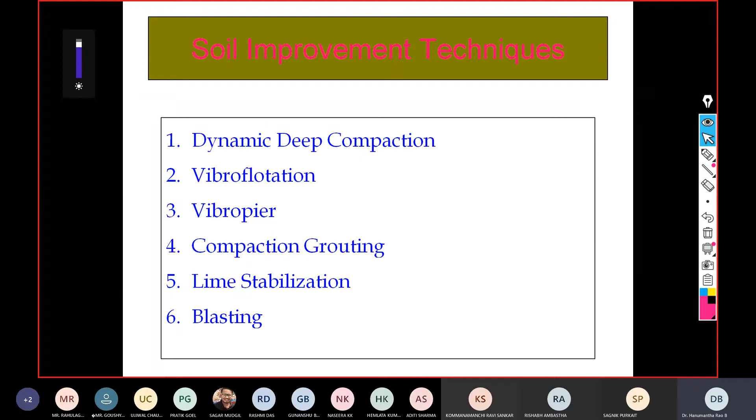Let me start another ground improvement technique. This is one of the very simple, effective, and economical ground improvement techniques. There are several ground improvement techniques, and a few of them have been listed here: dynamic deep compaction, vibroflotation, vibropier, compaction grouting, lime stabilization, and blasting.

Today I'm going to talk about one kind of in situ densification of the soil sample, that is deep dynamic compaction. Now, to understand the meaning of deep dynamic compaction and its application, first let us try to recall what we discussed in the previous class on compaction.

If you look at the left side picture, this typically represents compaction. When you talk about conventional compaction, what we normally do is compact the soil layers in thin lifts, or in several number of layers. As we can witness from this picture, we compact the soil sample in layers: 1, 2, 3, 4. We are also aware that the thickness of each lift shall not exceed 200 to 300 millimeters.

That is one of the biggest limitations of conventional compaction when using rollers. Just imagine if a 200 millimeter thick sample is the limitation, then if you want to compact a 1 meter thick soil deposit, you have to excavate the whole soil sample and again replace it in 4 or 5 layers, compacting each layer. This is very laborious and time consuming. Moreover, just imagine a requirement where...

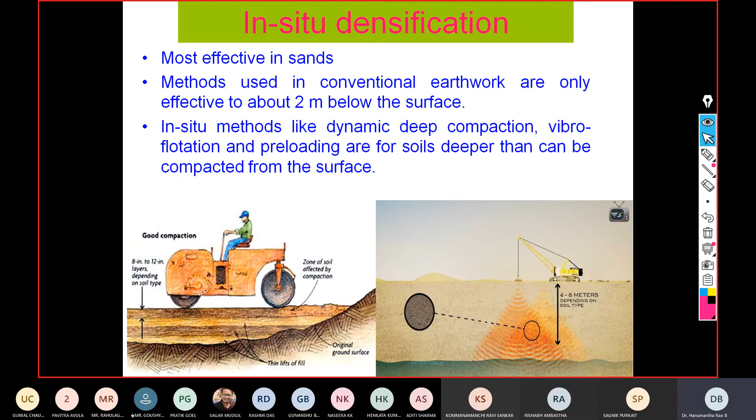Let us try to have more details about what is deep dynamic compaction, how it works, what are the different other dynamic deep compaction techniques, and what is its application. First of all, when you talk about deep dynamic compaction, this is valid only for sands or coarse grained soils. I will explain the justification why it is valid only for sand in the subsequent slides.

In this slide, a couple of ground improvement techniques have been shown. The top left side is vibroflotation. Here a vibrofloat, as you can see in this picture, is driven into the ground up to the desired depth. Because of the vibration, this vibrofloat vibrates and accentuates the vibration energy in the lateral direction, and thereby densifies the soil in the lateral direction, not in the vertical direction. Anyhow, we are going to cover a full chapter only on vibroflotation.

So vibroflotation is one of the deep dynamic compaction techniques. The vibrofloat can go up to hopefully 60 meter depth, because it only depends upon how much depth we can drive the probe. This is the probe, and as long as we can drive the probe, that much depth of the soil can be densified. The second ground improvement technique is deep dynamic compaction.

Here a heavy tamper having a large weight is used to densify the soil mass below the tamper. This is the tamper. When you drop this tamper from a large height, you can see this is the height, because of the potential energy, the soil below the tamper gets densified. Deep dynamic compaction is said to be effective up to a depth of 40 meters, but this is only tentative, as I told. Then another technique is dynamic roller compaction.

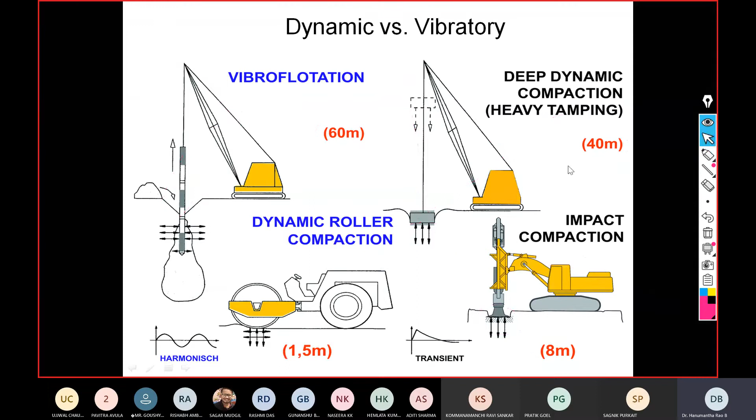I hope it is clear to you all now. So vibroflotation is typically used for sand. Deep dynamic compaction is typically used for sand. Impact compaction preferably for sand, but for mixtures of other soils also. Dynamic roller compaction for mixtures of all other soils. So this is the details about the dynamic compaction.

As we can see, this is a crane. This is a big crane, and this is called a tamper. This is the height. The crane is used to lift the tamper to a particular height and drop it on the soil mass.

This technique was first proposed by Louis Menard in the year 1960. This is one of the ground improvement techniques, implementable in case of building foundations, roads, or railway embankments. In all these applications, deep dynamic compaction is used. This is one of the high energy compaction techniques, where the high energy impact is caused by dropping a tamper from a large height.

So these are some details about the tamper. Dropping of heavy weight - this is the heavy weight. What is the weight of this one? 100 to 400 kilonewton, so this is substantially high. Then the height we can lift up to is in the range of 5 to 30 meters.

The lift height depends upon what is the depth of improvement that you are envisaging. If the depth of improvement is small, then we can lift only 5 meters. If the depth of improvement requirement is significant, then we can go for higher lifts, say 30 meters. When this tamper is lifted and dropped, only a particular location of the soil sample gets densified. But what if I want to densify a large area? Then I have to follow some kind of pattern.

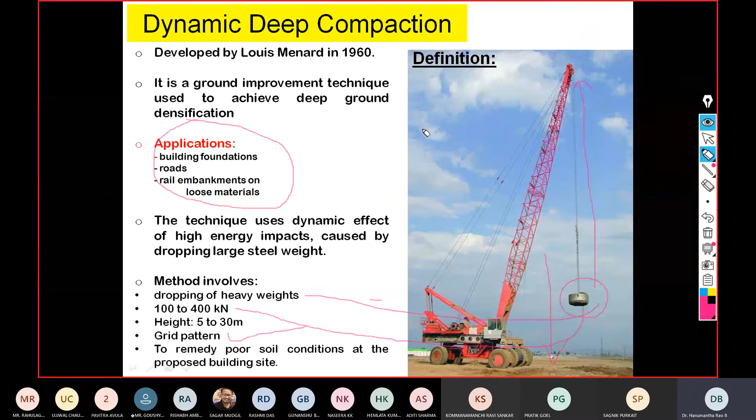So this is the deep dynamic compaction. As you can see, this is the pounder or tamper. Mass is 5 to 30 tons and drop height is 10 to 30 meters. When you drop this tamper, it is going to create some kind of hole that is called a crater. Now we can see this crater is created on in situ soil.

So the soil underneath the tamper is totally densified or compacted. This technique is particularly well adapted for non-organic, non-homogeneous fills, ground reclamation areas, and karst terrains with sinkholes. It is typically used for sandy soils, fill soils, man-made embankments, and so on. Wherever you find loose soil, you can go for deep dynamic compaction. However, the biggest limitation is that this is typically valid only for granular soil, not cohesive soil.

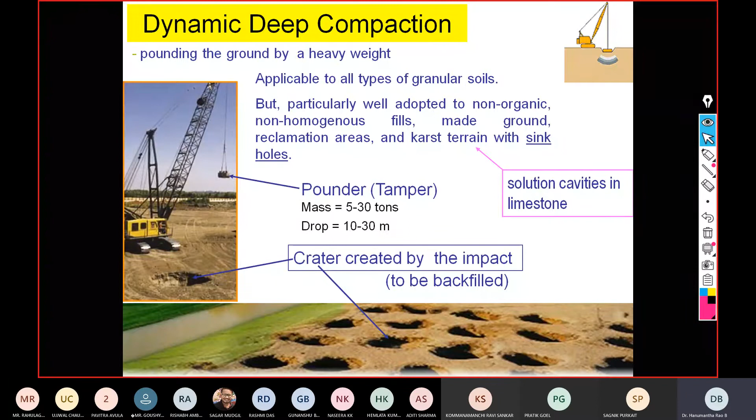As I told you, when you go for deep dynamic compaction, we follow a specific pattern. Here it has been shown in a linear way. These red circles indicate the gap left between two impacts. So this is one impact, this is the second impact, third impact, fourth impact, and subsequent impacts.

As you can see, the impacted area is designated with a kind of triangle. This indicates the transmission of energy from the ground surface to deeper levels. As you go deeper and deeper, the energy transmits over a wider area, which is why it is triangular in form. We saw the same thing in the case of consolidation, where we assumed the spreading of the load as one horizontal to two vertical, or one vertical to two horizontal.

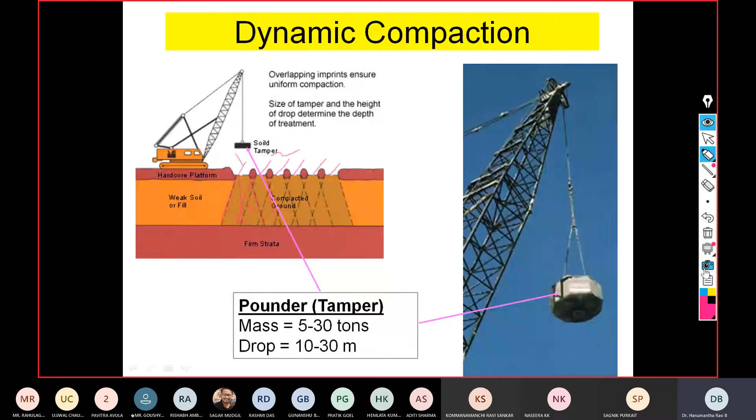So therefore, what should be the optimum spacing between any two impacts? That is one of the design parameters.

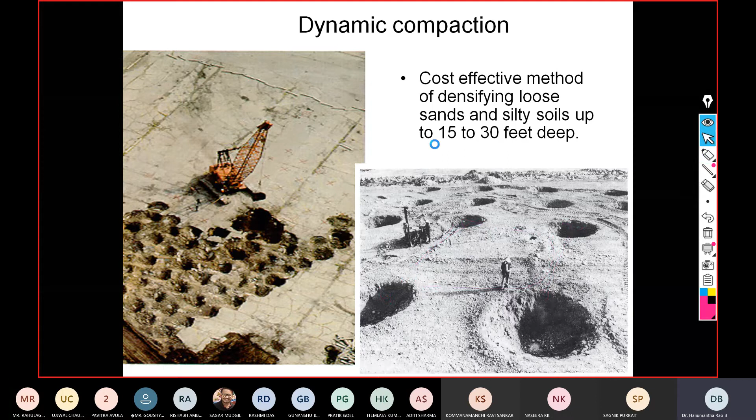These are some advantages and limitations of deep dynamic compaction. It is particularly useful when the area is too large; if the area is greater than 5,000 square meters, it is most economical. It reduces the volume of the landfill, fill material, waste material, or reclaimed soil, as the volume appears in the form of a crater. More craters mean more reduction in volume; deeper craters mean more reduction in volume, or more densification. It increases in-situ density and collapses the voids. In fact, unless there is a collapse of the voids, there is no improvement in density. So density and the removal of voids are interrelated.

Since we talk about compaction, we should explicitly understand that it is expulsion of air from the voids, not the expulsion of water from the voids. If it is expulsion of water, then that becomes consolidation. Once density is increased, it obviously increases the bearing capacity and reduces post-construction settlement.

This is one fundamental thing you must understand with regard to ground improvement: the primary purpose of adopting any ground improvement technique is for two things. Suppose the soil is poor, having very low bearing capacity, or where settlements are too large. What we do by adopting ground improvement is create a situation where, by artificially imposing the load, we enhance the settlements even before construction of the structure.

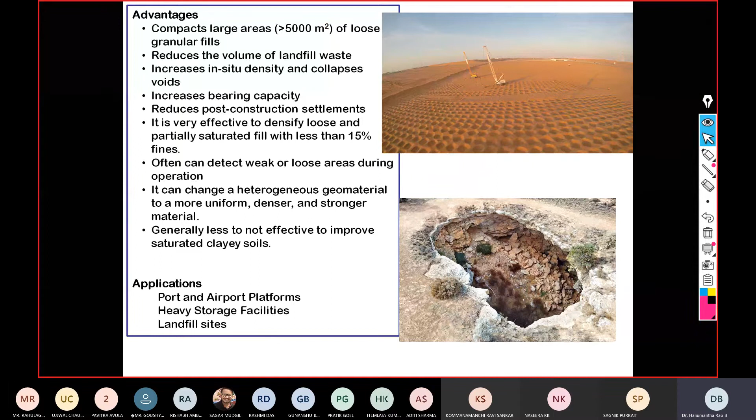And the applications of dynamic compaction are enormous. This is particularly useful for construction of ports and even airports, heavy storage facilities like oil storage facilities, landfill sites, or reclaimed soils. So this is the fundamental mechanism of dynamic compaction.

As you can see, when a heavy tamper is dropped from a particular height, this creates an impact energy. First of all, impact energy - this impact energy is because of the potential energy created from the heavy weight dropping from height. This is something like mgh, that is the potential energy.

Now when there is a sudden, instantaneous impact, this creates a kind of shock wave, which generates some kind of waves. Since it is on the surface, as we know from the soil dynamics chapter, on the surface only two kinds of waves can be generated: Rayleigh waves or Love waves. In this case, they are Rayleigh waves. And as compared with the P wave or S wave, Rayleigh waves and Love waves are more dangerous and more destructive of the particle structure.

So when the shock wave is developed and is moving or transmitting from the ground surface to the deeper layers, it rearranges the particles because of the impact energy. That rearrangement takes place simultaneously in the vertical direction as well as in the lateral direction. Therefore, when there is dynamic compaction, it is not only the soil in the vertical direction that gets densified, but in the lateral direction also.

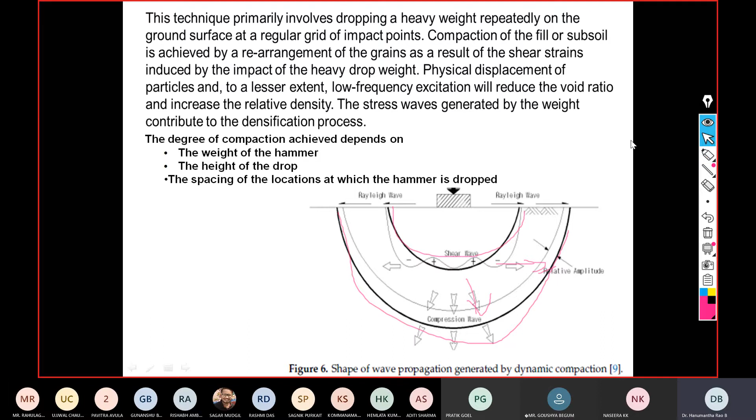Okay, now is it clear why the dynamic compaction is valid only for sand? It's not valid for the clay material. But people have already tried the effectiveness of dynamic compaction on clay as well, and in that case, we will see what happens.

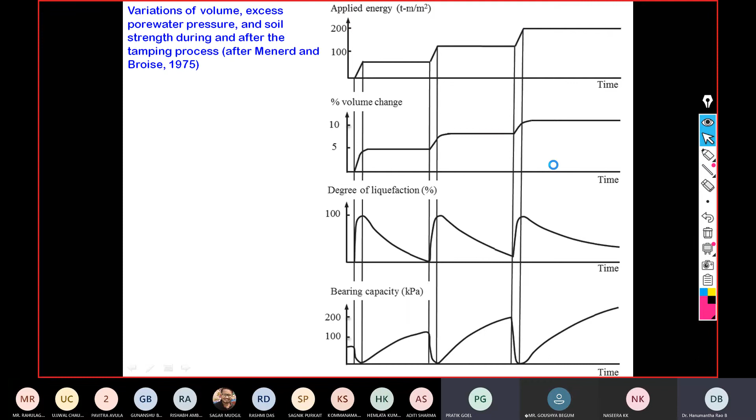So depending upon the soil type on which you are going to use the dynamic compaction, if it is sand, it is called dynamic densification. If it is clay, then it is called dynamic consolidation. So densification I just explained: impact by a heavy tamper on unsaturated granular material immediately displaces the particles to a denser state. This is simple expulsion of air from the voids.

Dynamic consolidation: this theory was proposed by Menard and Broise in the year 1975. They tried to use dynamic compaction on saturated fine-grained soil by applying repeated blows. So here, when there is an impact, in case of clay it cannot undergo liquefaction; rather, it turns into slurry.

Depending upon the soil type, other phenomena can happen. In case of dynamic consolidation, there are four kinds of phenomena: compressibility of saturated soil, liquefaction, change of permeability, and thixotropy. The last one is most important. Thixotropy means regain in strength, as you must have understood in soil mechanics, with time under undisturbed condition.

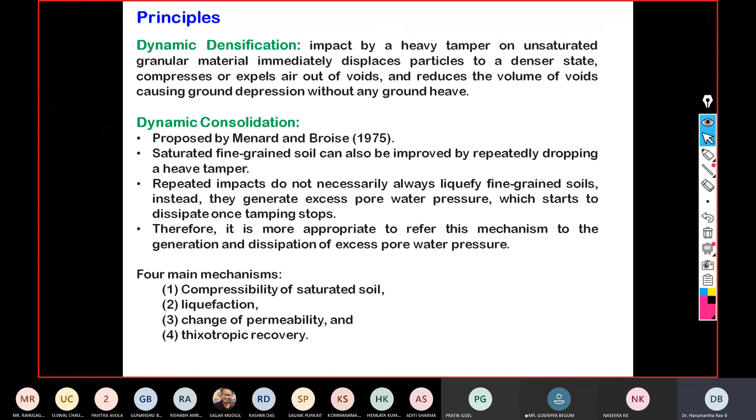There is compressibility of the saturated soil. This happens only when there is expulsion of water, but that cannot happen immediately. What immediately happens is generation of excess pore water pressure, and that pore water pressure keeps dissipating with respect to time. When pore water pressure gets dissipated, the consolidation obviously happens.

Due to the impact, there is formation of fissures, through which water gushes out. When water comes out, the consolidation gets accelerated. Before impact there were no fissures, but after impact the water comes out through the fissures. Therefore one can easily expect a change in the permeability.

The last phenomenon is thixotropy, which is regain in strength when the sample is kept in undisturbed soil condition. This is specifically valid for clayey soils, not valid for sands - in fact it's not valid, it is valid only for fine-grained clays. This is the difference of implementation of dynamic compaction on sandy soils versus clayey soils.

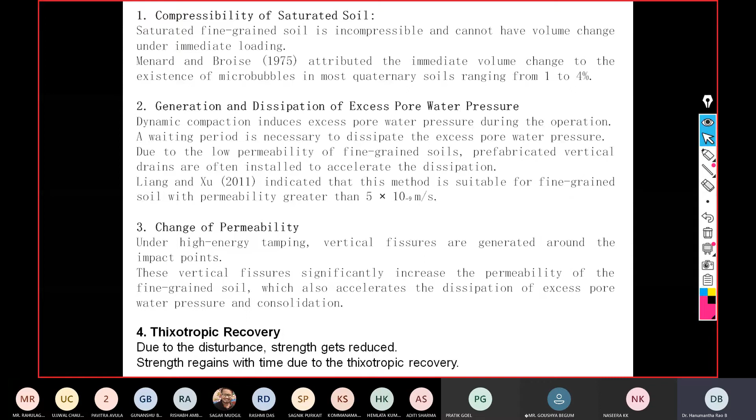Now let us come to the design part. That is the mechanism. During dynamic consolidation, does the structure of clay also change? Yeah, obviously. There is complete destruction of the structure, and there is a new formation of the structure.

Does it go from flocculated to dispersed stage, or does the structure break completely? There is no breakage of structure, because clay particles are nanometers or micrometers - usually no particle breaks, but even if breaking occurs, they rearrange from flocculated state to dispersed state. In case of dispersed state, permeability should reduce - so it is increasing just because of the cracks. Yeah, the permeability increases only because of the cracks.

But if you look at the permeability of the compacted soil after elapsed time, that permeability is obviously much lesser.

Now we understood the mechanism of deep dynamic compaction. How shall I understand how much depth of soil I can improve? This is designated as improvement depth, DI. We have only two parameters: the weight of the tamper and the height of fall. The depth of improvement should be proportional to the weight of the tamper and fall height. Several people have made analytical derivations relating depth of improvement with W into H, and introduced a constant called alpha.

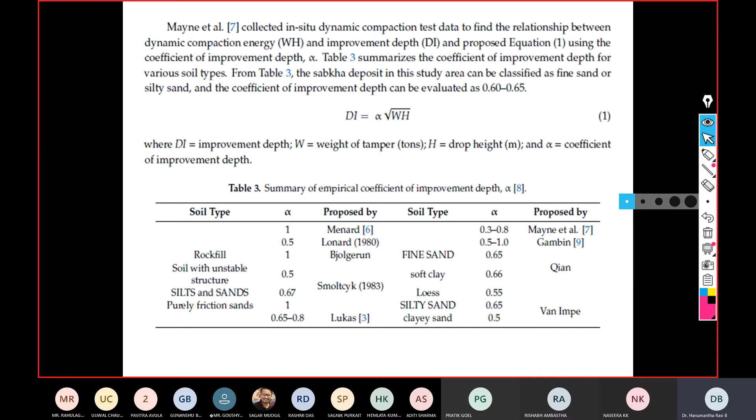So this is clear, and this is a simple equation one can use to determine the improvement depth based on the amount of energy applied on the soil sample.

Depending upon the type of soil that you are dealing with, people have categorized the soil into 3 zones: zone 1, zone 2, and zone 3. This zonation has been done based on 2 parameters: permeability and plasticity index.

Zone 1 consists of pervious soils like coarse grained soils, gravels and sands, where the plasticity index is 0, non-plastic soils, and the permeability is very high, 10 power minus 3 centimeter per second.

Zone 2 is semi-pervious soils. These soils exhibit plastic behavior, where the plasticity index ranges from 0 to 8 and the permeability is 10 power minus 3 to 10 power minus 6.

Zone 3 is impervious soils, where the plasticity index is above 8 and the permeability is 10 power minus 6 centimeter per second, low permeability, so almost impervious soils.

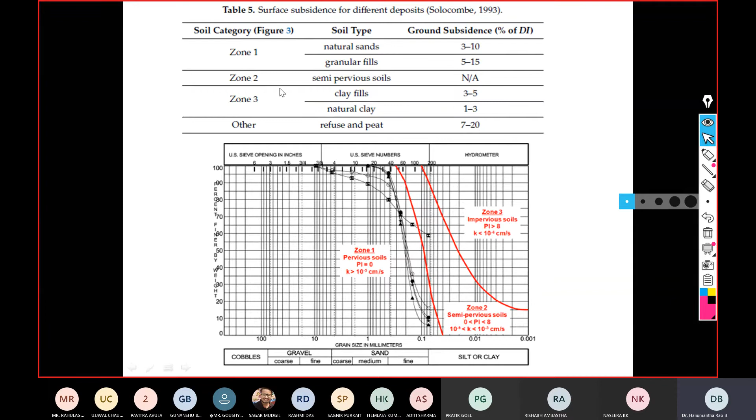You can see what kind of soils fall under zone 1: natural sands and granular fills. Zone 2: semi-pervious soils, nothing specific. Zone 3: clay fills and natural clay. This is how one can understand zone 1, zone 2, and zone 3, and the approximate ground subsidence anticipated for each.

So why is dynamic compaction required? This question is already attempted. The technique is used to improve the bearing capacity, density, shear strength, consolidation, and so on, especially of cohesionless soils.

This technique is ideally meant for pervious soils, that is coarse grained soils, sands, fills, reclaimed soils of granular materials, and so on. It also decreases the permeability and thereby reduces the liquefaction potential.

One thing you should understand is that during dynamic compaction itself, we are creating a localized liquefaction phenomenon within the soil mass. So therefore, once it is densified, it is anticipated that no more liquefaction could occur after the construction of the structure on that particular soil sample.

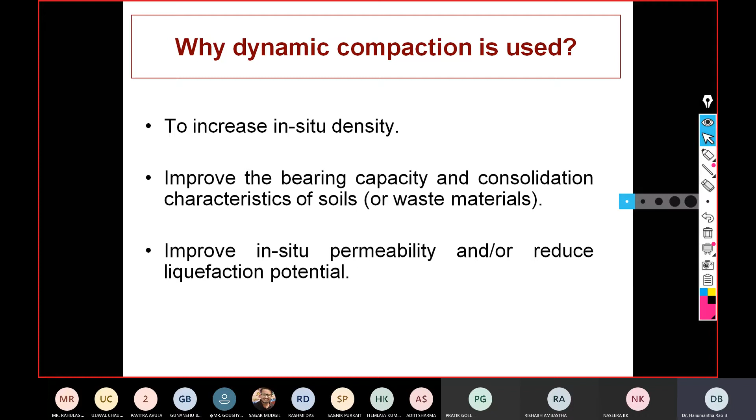This slide talks about the suitability of deep dynamic compaction in a very elaborative way. All pros and cons have been listed in this slide. The technique is most effective for coarse, free, drained, granular soils.

So try to understand: it should be coarse grained soil, and there should be free drainage, meaning the permeability of the soil should be very high. Whether well or poorly graded, or saturated or not, doesn't matter, but the material has to be coarse, free draining, granular soil. Cohesive soils tend to absorb the energy.

This energy is required to separate water molecules from the clay particles. So the much amount of energy is only used to separate the water molecules from the soil, and densification cannot happen. Such absorption of energy limits the technique's effectiveness. It is not recommended for clayey soil with high plasticity index, greater than 8, and high degree of saturation.

So this is quite clear. It is especially suited to compaction of rock fills, because all rock fills are free draining materials. Therefore the technique is highly effective for rock fills and gravels with boulders, and of refuse and waste tips. Refuse means, once you have used rock materials or crushed rock, this is called refuse or waste, and natural heterogeneous coarse soils.

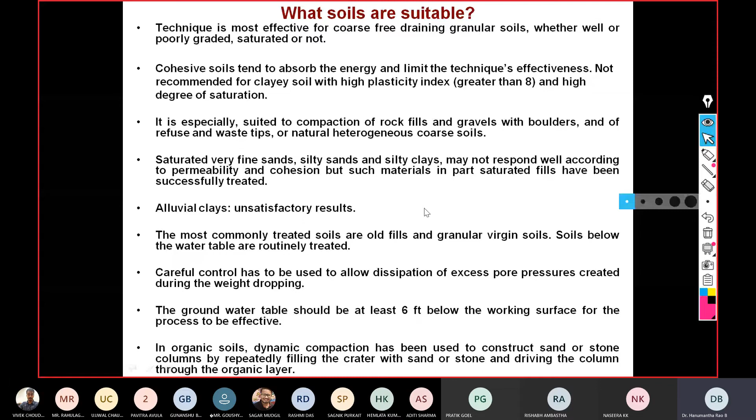In organic soils, dynamic compaction has been used to construct sand or stone columns by repeatedly filling. So this technique is not valid for organic soils, but dynamic compaction can be used to create other kinds of structures in organic soils. These are the elaborative descriptions about the suitability of dynamic compaction for different soil types.

This is another recommendation: expected improvement and required energy with dynamic compaction. This table is very important, it can be taken as some kind of guideline. For example, if you are dealing with gravel and sand with less than 10% silt and no clay, the expected improvement is excellent. The typical energy requirement is 2 to 2.5 tons-feet per cubic feet. These figures were proposed by different people depending upon field data.

Suppose you are dealing with sand with 10 to 80% silt, less than 20% clay, and a plasticity index of less than 8. These are called moderately effective if dry and minimal if moist. So the effectiveness of the technique is moderate if the soil is dry and minimal if it is moist. The amount of energy required is slightly high, that is 2.5 to 3.5.

Fine grained soil with plasticity index greater than 8 is not applicable. We forgot about landfill - excellent, with the amount of energy required being 6 to 11.

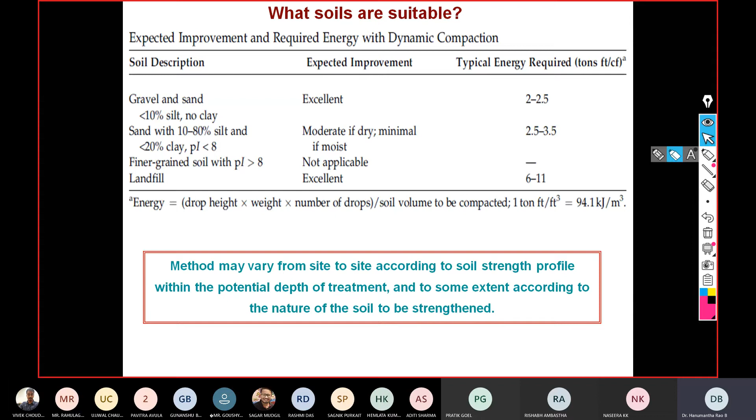So we know total how much energy we are applying in case of the standard or modified Proctor. But when you go for dynamic compaction, we do not know what volume is going to be impacted, so this is based on an assumption. So these are the different stages.

First, prior to the commencement of work, a granular blanket of 1 meter thick is placed on the treated area, on top of the soil to be treated. The weight is dropped from a height of 25 meters, with up to 5 number of passes and up to 10 number of drops per pass.

Here there are two things: number of passes and number of drops. At a particular location, it is not only one drop - we can go for more than one drop, that is, multiple drops can be done at one particular location. It is followed in a particular rows and columns pattern, the rows in horizontal, length and width directions. So at the same location, again you can come up and again drop from height.

For example, say 10 number of drops are required at one place. I can divide the 10 into 5 passes, meaning corresponding to each pass, 2 numbers. First, I can make one row, so at each location I go for 2 drops. Then come again for 2 drops, come again, and then again 2 drops - that is one pass with 2 number of drops. On the first pass, the deepest layers are compacted.

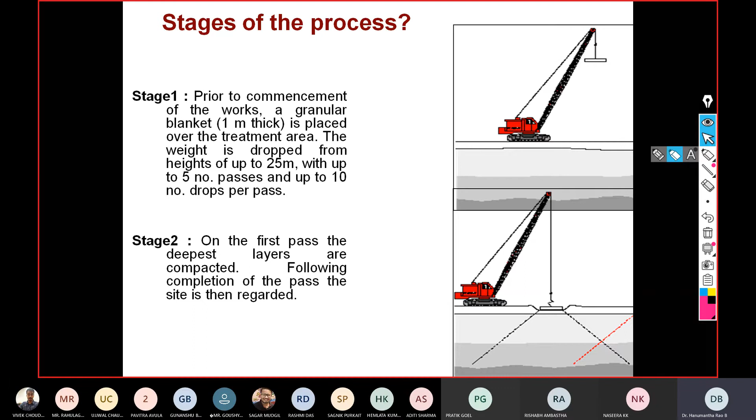Following the completion of the pass, the site is then regraded. During the initial passes, the deepest soil layers get compacted. Subsequent passes compact the successively shallower layers, following which the site is regraded. The final tamping pass is often continuous to compact the soil at shallow depth.

So if you look at stage 1 to stage 4, these stages indicate clearly 3 points. The first is during the initial pass, the deeper soil gets compacted. During the second pass, the intermediate soil gets compacted. During the final pass, the top soil gets compacted.

Now, if you recall from any of the previous slides, the soil between the craters is always in a loosened state. Therefore, we need to level the ground so that all the craters are filled with the loosened soil. So the final pass is always meant to compact the leveled soil. That is the meaning of it.

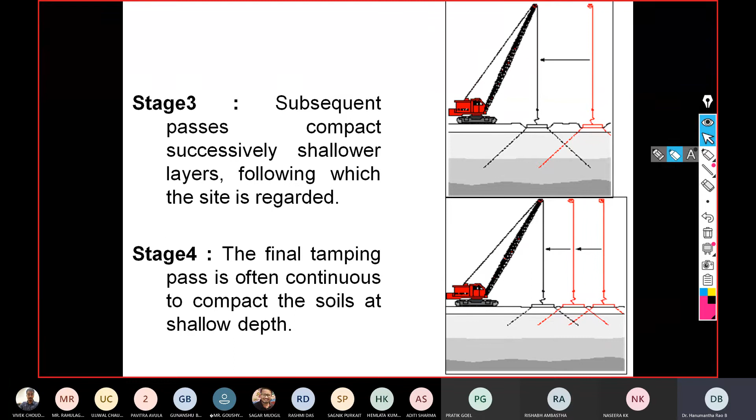So these are some knowledge points about deep dynamic compaction. When there is a drop, you can see the formation of the failure plane and the zone of compaction. This is the zone of compaction, and this dotted line indicates the potential slip surface.

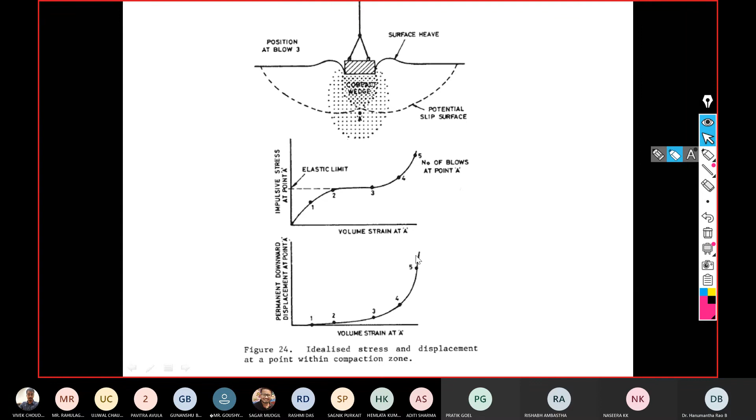So this is the sudden volume change because of the application of the heavy impact load. But if you look at the ultimate state, both the soils are achieving the same state. When you resort to deep dynamic compaction or consolidation, both ultimately have to reach the same state. However, the initial treatment that we apply is a bit different, but the ultimate state that they are reaching remains the same.

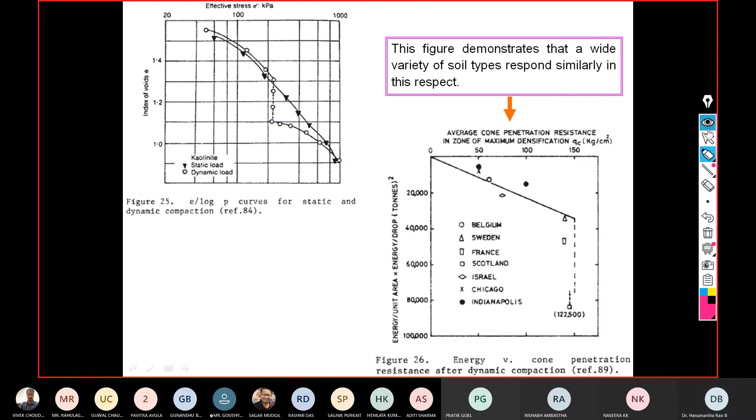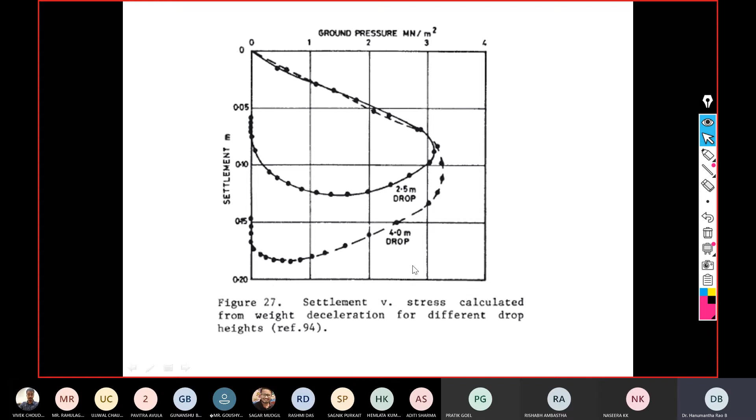So this is the ground pressure versus settlement as a function of the number of drops, and settlement versus stress calculated from weight deceleration for different drop heights. There is a settlement, then a recovery - there is a settlement and there is a recovery, depending upon the soil type.

If you draw a correlation between the square root of the energy applied versus the depth of improvement, and draw a linear graph, the slope is nothing but the coefficient of depth of improvement.

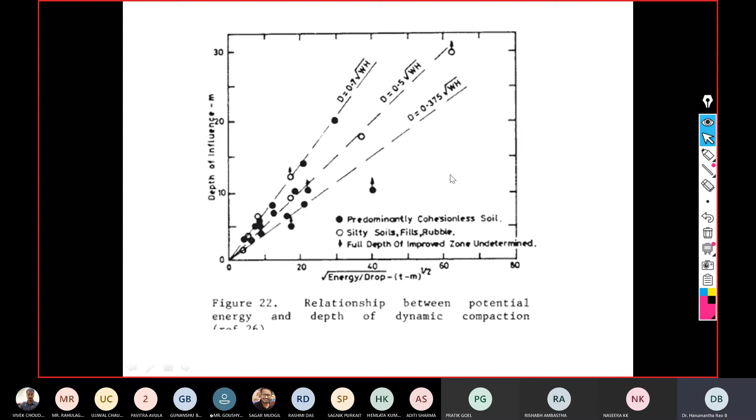So once the dynamic compaction has been done, how do we ensure whether or not we achieve the desired density? How do we ascertain this point? In order to ascertain this, we need to conduct some kind of in situ investigation. But what kind of in situ investigation should we conduct so that I'll be aware that the soil has reached the desired density?

One of the simplest techniques is we can go for SPT, that is standard penetration test, or cone penetration test, or pressure meter test. The type of test you should conduct depends upon your requirement. Suppose if your requirement is only settlement, then you can go for SPT or CPT. Or if your requirement is more of load bearing capacity, less of settlement, then we should go for the pressure meter test. So these are a few soil investigation techniques that should be done post dynamic compaction to ascertain whether or not the soil has been improved to the desired degree.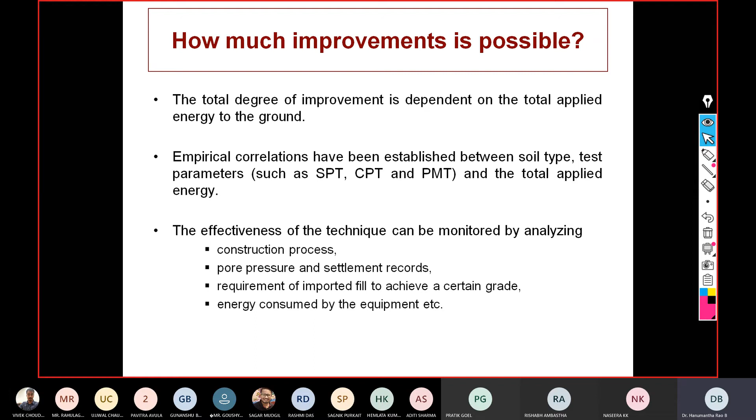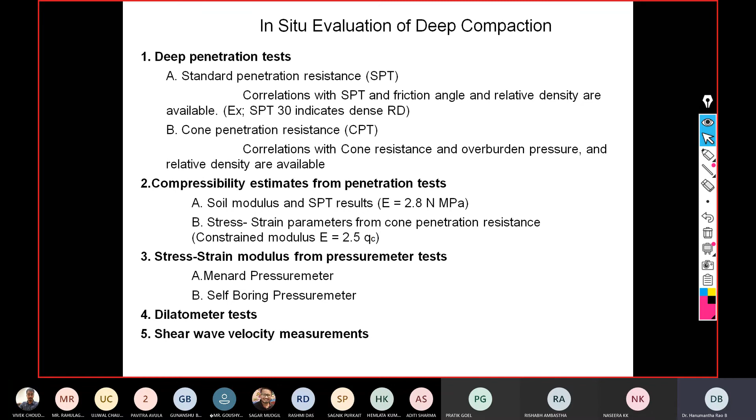So again, the list of other techniques: deep penetration test, SPT, CPT, then compressibility estimates from penetration test, then stress strain modulus from the pressure meter test. Either you can go for the Menard pressure meter or self-boring pressure meter, or you can also conduct dilatometer test or shear wave velocity measurement test. So these are the variety of tests that can be conducted on site which is subjected to deep dynamic compaction.

So this is the response before and after the ground has been subjected to dynamic compaction. As you can see here, this is the SPT profile as a function of depth - before compaction and after compaction. You can see there is a huge increase in the values of the SPT. Similarly, CPT value before and after dynamic compaction, and similarly pressure meter test before and after compaction. This is how you should ascertain that the ground has improved to the desired degree.

Because once we know the SPT value, the CPT value, or pressure meter value, we can correlate these things with bearing capacity and settlement. Thereby we can ascertain whether the compaction which was done is enough or not.

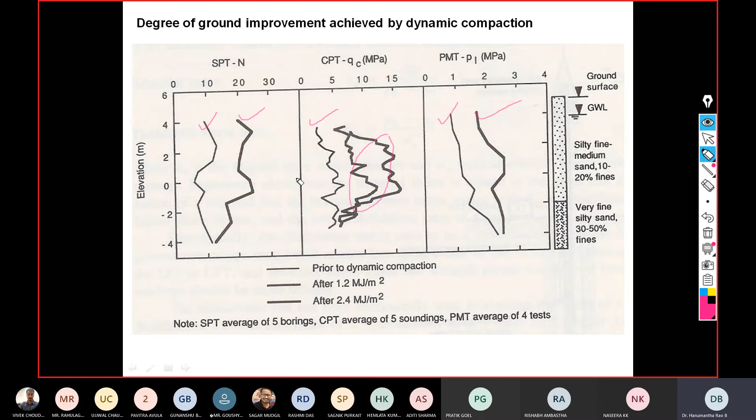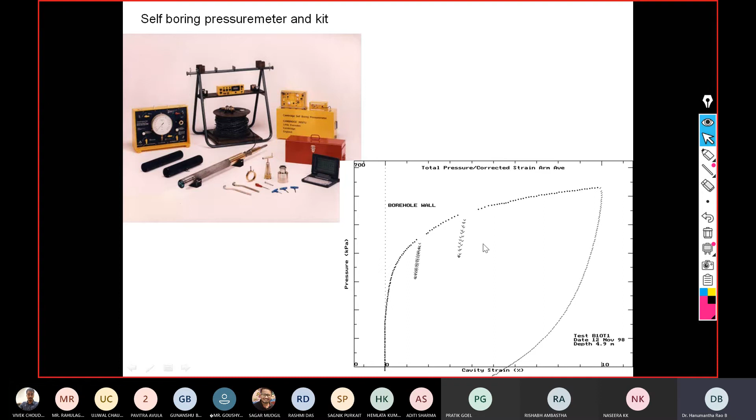So these are the devices. This is the self-boring pressure meter kit, and this is the response of the self-boring pressure meter kit. This is the flat dilatometer, and this is the setup for shear wave velocity measurement. So these are the shear wave velocity measurements as a function of depth - this is before and this is after. As you can see, there is a huge improvement in the shear wave velocity. Since the soil remains the same, the increase in shear wave velocity indicates that there is an improvement in the density.

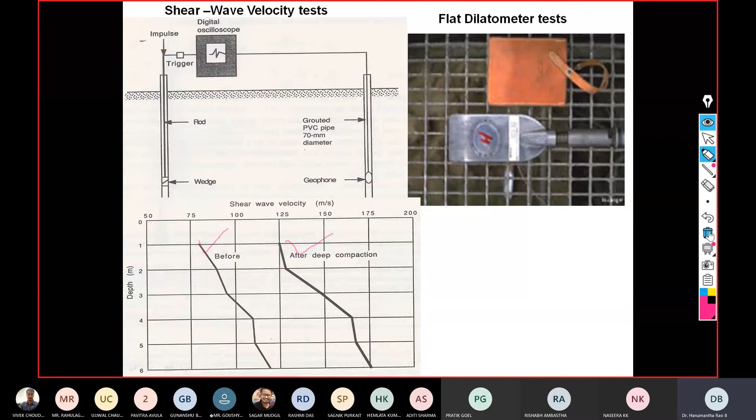Okay, so let us go to the design consideration. But before I go into the design consideration, let me take a couple of questions from you all. What did you understand about dynamic compaction? If you have any questions, you are free to ask me now.

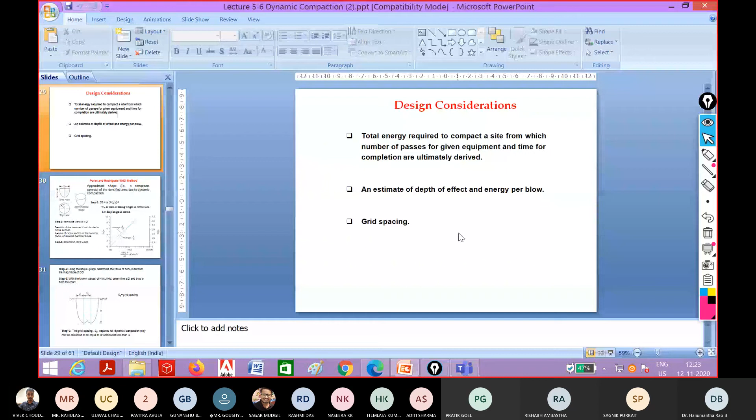Questions, please. Hello sir. Yeah. Sir, you have told that the formula for the depth is the square root of W into H. Yeah, some slides. Yes, yes. Correct.

Yes, so it is not dependent upon the number of blows in that equation. No, no, this equation is not dependent on the number of blows, because your depth of improvement already by default includes the number of blows. When you calculate the depth of improvement, it has already by default included how many number of blows you have done at that particular location.

But you have told that for the first phase, the deepest strata will be improved first, then in the second phase the intermediate, and in the last phase the above strata will be modified. Yeah, that is true, that's what exactly happens. For example, at a particular location, you determine that 3 number of drops are required. Now there are two things - in the first number of blows, can I get the full depth of improvement? May not be. So what exactly happens is during the first drop, the deepest soil layer gets compacted; during the second drop, the intermediate soil gets compacted; during the third drop, the shallower soil gets compacted. That's what is reported, this is the observation. Now the summation of all three is the total depth of improvement.

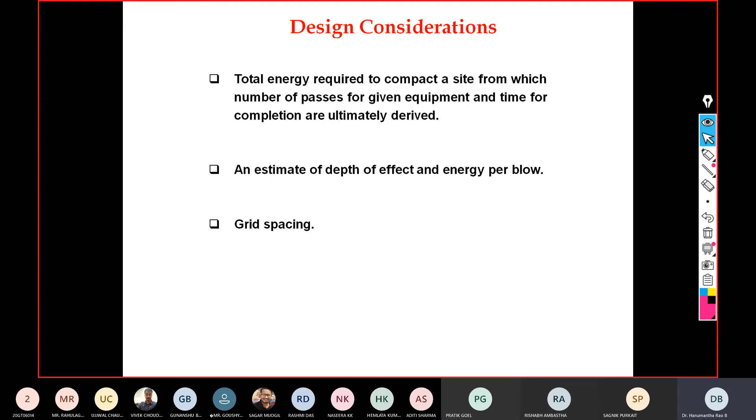As we know, depending upon the perviousness, a certain amount of energy is required, so we can take that much amount of energy. Then depending upon that much energy, we can decide the number of passes and the drop height, drop weight, and so on and so forth. Okay, so then grid spacing also.

Now one important thing is that when you go for dynamic compaction, I have a machine with me. One thing you should understand: I have a machine with me, I have a tamper with me, I know the weight of the tamper. Only thing I can fix is I can change the height of the drop. I can change the drop height, but I cannot change the tamper weight because that is fixed to the machine.

So that means a couple of parameters are fixed already. One thing is I know the tamper weight. Second thing, I know the soil type, so therefore I can decide the total energy requirement. The third thing is I know the depth of improvement because I know the soil profile. This is the reality.

But if you do examples, we will come in a reverse way. Usually in the class, we will come in a reverse way. So we will give the weight of the hammer and height of the hammer, then I can calculate what is the depth of improvement. That is simple.

Okay, but in reality it is different. I know the soil profile, so I can decide what should be my depth of improvement. I know the weight of the hammer, so therefore I can calculate what should be the height required. So this is step one: depth of improvement is nothing but alpha into square root of W into H, where W multiplied by H is the energy applied on the ground.

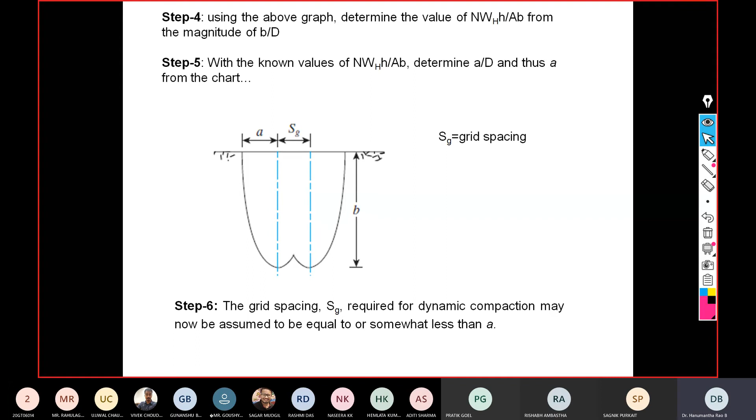So the grid spacing SG required for dynamic compaction may now be assumed to be equal to or somewhat lesser than A, that is SG. So this is quite a simple procedure. For demonstration purpose, please take a pen and paper and try to solve this sum.

So the following is a typical example. Weight of the hammer is 18.5 kilonewton. Height of drop is fixed as 26 meter. Width of the hammer is 5 meter. Then you need to determine the number of drops and the grid spacing.

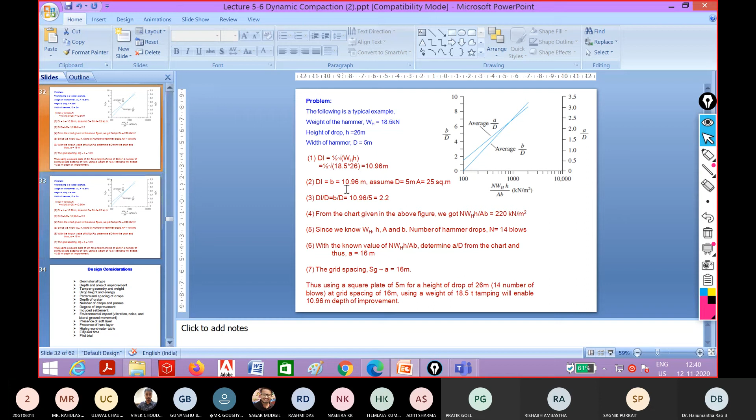I better instead of showing this one, just take a pen and paper. Try to design the number of drops required and grid spacing required.

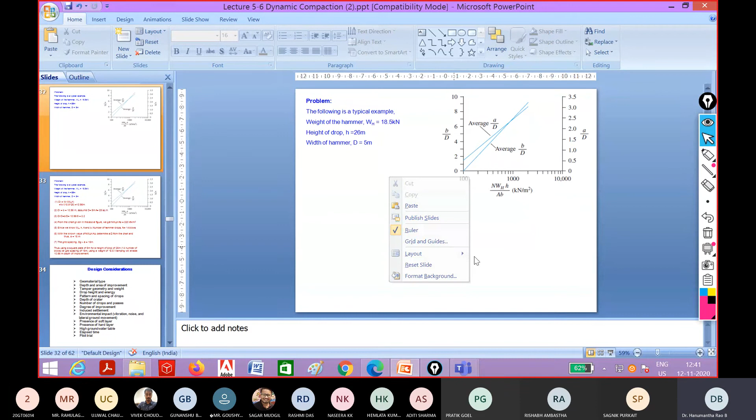So did anybody calculate what is the depth of the improvement? So 10.9658. Okay, so here one important thing is when you calculate depth of improvement, that is the alpha value, you can assume depending upon the soil type. So here no soil type has been mentioned, so you can assume any value of alpha as you don't know anything.

But units are a must because this is an empirical equation. The relationship of DI equal to alpha into square root of WH is an empirical equation. So the units of W and units of H have to be maintained only in those particular things. I think W is in tons per meter or in tons, and H must be in only meters. You cannot use no other units. You cannot use your own units of W and H to follow whatever the stated units are.

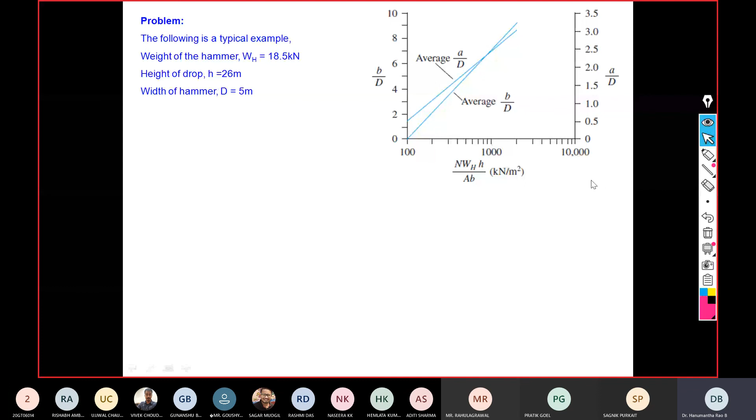Okay, so one thing: suppose the weight of the hammer is 18.5 ton. Consider 18.5 ton. Then step number 1 is correct, because as per the previous equation, it should be in ton. As for this equation, the WH must be in metric tons. That satisfies it. So what you do is substitute, convert 18.5 tons into kilonewton.

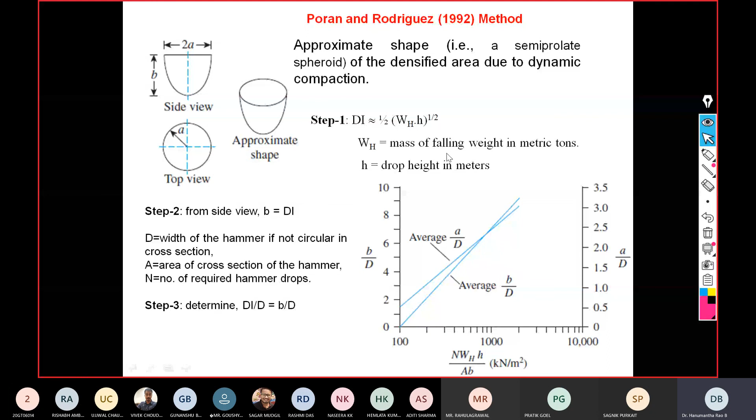One more thing, 14 number of blows. So in that case, when you convert 18.5 ton, sir, it is coming 12.5, instead of 14.

No issue, how does it matter? So what you are getting is 12.5. Yes sir, 12.5 is coming. Okay, fine, very good. So what you are getting is 12.5. Okay, so make a correction, everyone.

Let me make it here only better. So please correct it to 18.5 ton. First of all, 18.5 ton, then everything is in line. So you are not getting 14 number of blows, rather you are getting 12.5 blows, or 12.5 number of drops.

Okay, very good. Now the question is, we can't apply 12.5. Either we can assume we round it down to 12, or we can round it up to a higher number. So therefore what we do is round it up to 13.